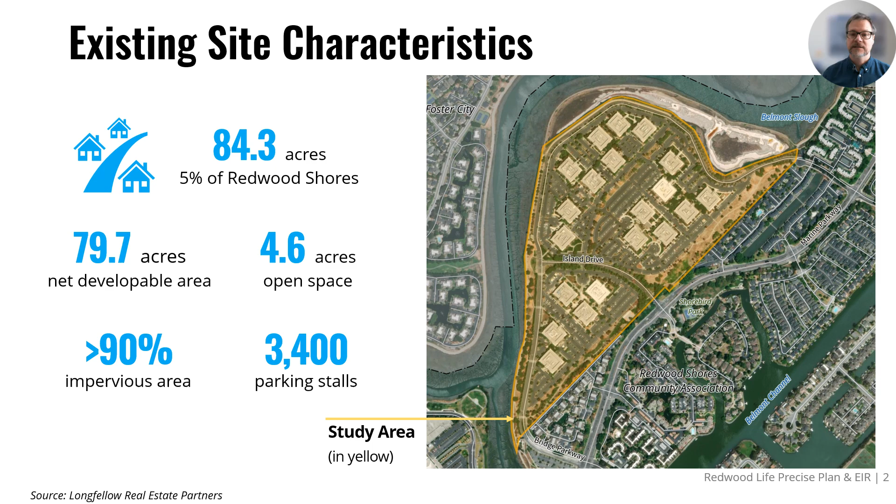The Redwood Life project site is about 84 acres in size. Approximately 80 acres represents the developed portion of the site, and about 4.6 acres are open areas. The area has a high proportion of impervious cover, meaning that most of the site is covered by paved surface, parking, or buildings. The site has around 3,400 parking stalls.

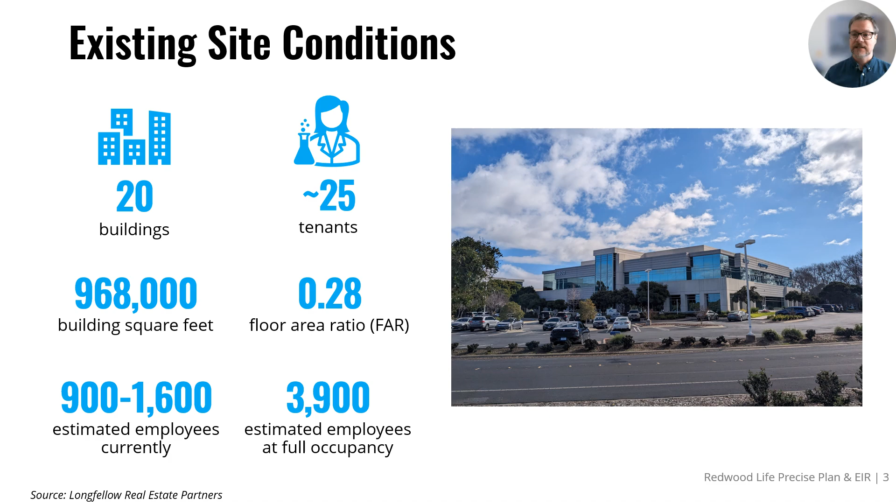The site currently hosts 20 two-story buildings that house over 25 tenants and an estimated 900 to 1,600 employees in research and development and life sciences. These buildings account for just under 1 million total square feet. At full occupancy, the existing buildings could accommodate nearly 4,000 employees.

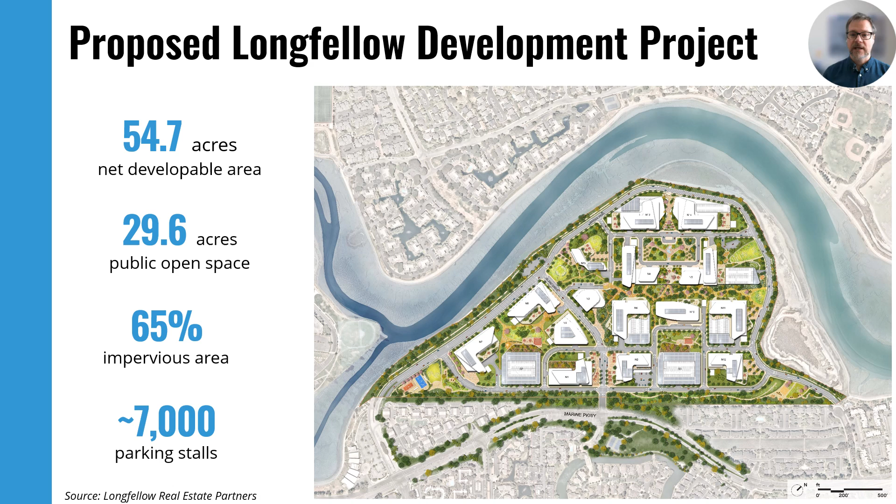Longfellow Real Estate Partners submitted a development application for the redevelopment of the site in 2022. The development project proposes to replace the existing 20 buildings with 15 new buildings. The proposal would remove nearly all of the on-site surface parking, with parking in a mix of standalone structures and podium-parked buildings. The project would increase the number of parking stalls on the site to accommodate a project build-out with up to 7,000 stalls.

This reconfiguration facilitates the development of approximately 30 acres of public open space and landscaping in the project area. This map illustrates the location of the hotel, amenity center, parking garages, and some of the parks and open spaces in the proposed Longfellow development project.

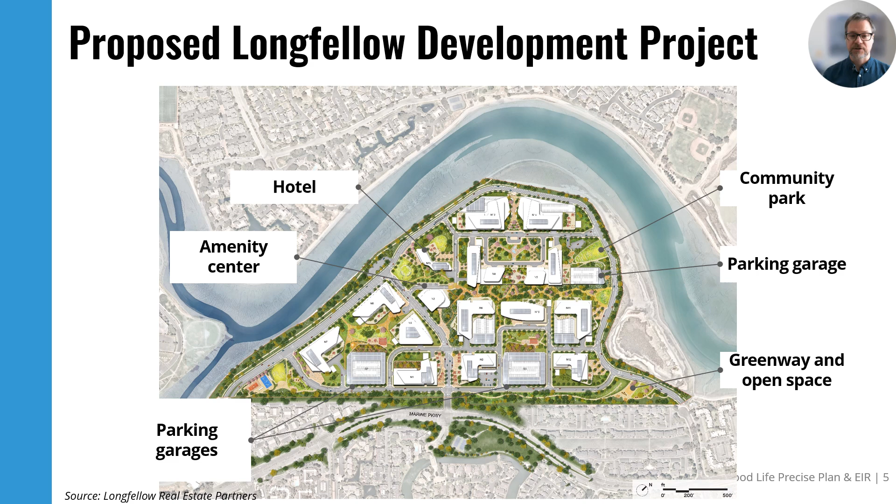The proposed development project requested an increase of 2.35 million square feet of new life sciences over the current existing 1 million square feet, to approximately 3.3 million total square feet. This includes a 104-room hotel and a publicly accessible amenity building. The floor area ratio would increase from approximately 0.3 to 0.95.

Most of the proposed buildings are between 4 and 5 stories in height, with some up to 6 stories, or 100 feet. The proposed project has an estimated phasing plan of 25 years.

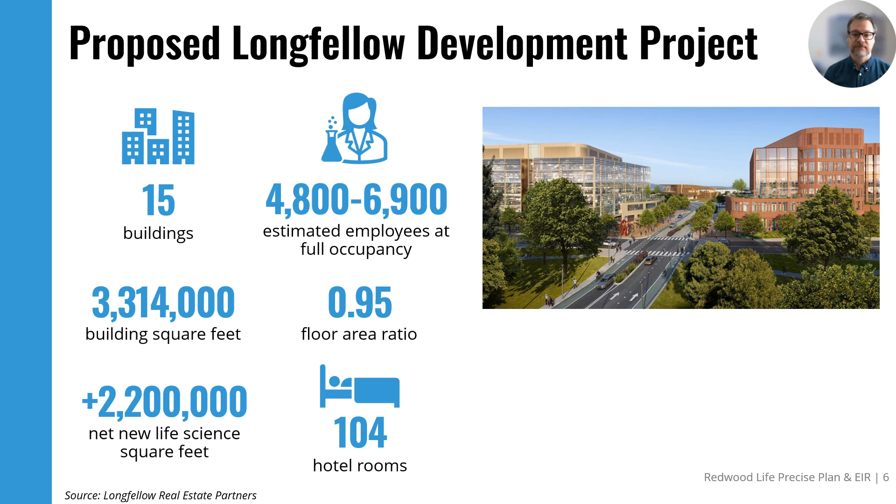As part of the proposed development project, Longfellow proposed a series of community benefits aligned with the city's strategic plan. These include contribution of $85 million for affordable housing in partnership with Eden Housing, a $2 million investment in childcare partnership with Build Up San Mateo County, an approximately 50,000 square foot amenity center with a community multipurpose room and gym.

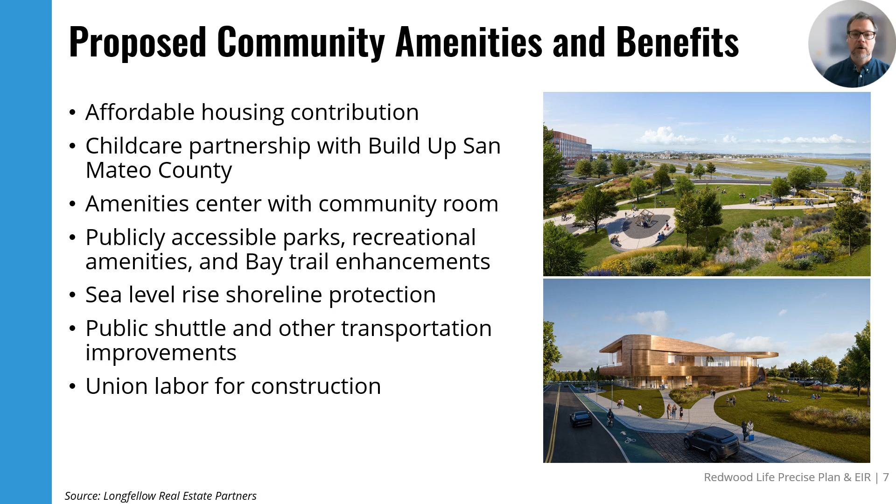Also, raising approximately 1 mile of the elevation of the levee around the site and road along the Belmont Slough for flood protection, provision of publicly accessible open space, and participation in a transportation management association to improve transit, carpool, and other active modes of travel to and from the site.

As part of this city-led precise plan and environmental impact process, City Council asked staff to prepare a project alternative to the proposed Longfellow development proposal to study through the California Environmental Quality Act environmental review process. Both the proposed Longfellow development project and the project alternative will be studied in full technical detail.

Once confirmed, the project team will initiate environmental analysis of the proposed Longfellow development project and the CEQA project alternative. This will include evaluation of potential impacts and, if needed, additional mitigation measures. It will also include detailed technical analysis of the transportation and wet utilities systems.

This included increased traffic, construction impacts including noise, truck traffic, deliveries, and the handling of materials on site, as well as the length of the development process.

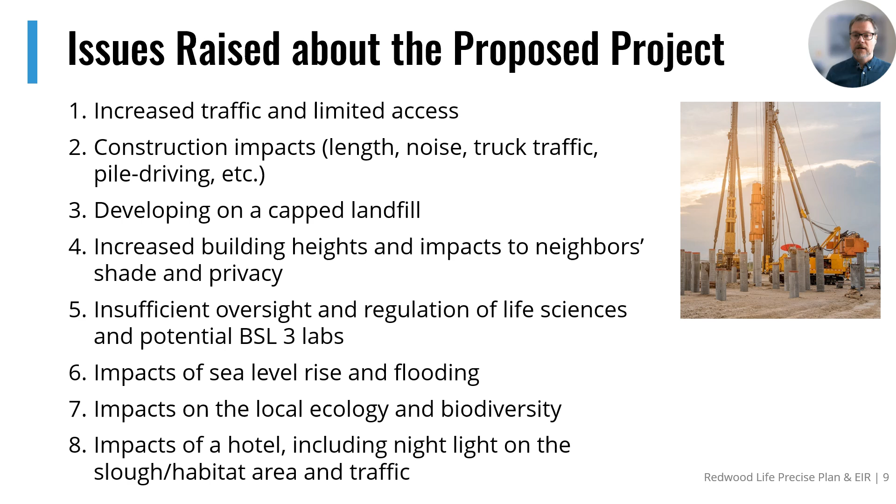Potential impacts associated with developing on a former landfill, including emissions or leaks, insufficient oversight and regulations of life sciences, and concerns about biosafety levels; impacts on local ecosystems and biodiversity from impacts of the project; and then impacts of the hotel, including night light on the Slough, as well as traffic overall.

We considered those comments combined with other community feedback we received on specific urban design strategies and site plan analysis, along with the development principles crafted earlier in the project, to shape the preliminary project alternatives. The development principles are intended to provide general guidance for the project at a high level, akin to guiding principles—statements of intent about the broad outcomes we hope to achieve, meant to guide the precise plan and its implementation.

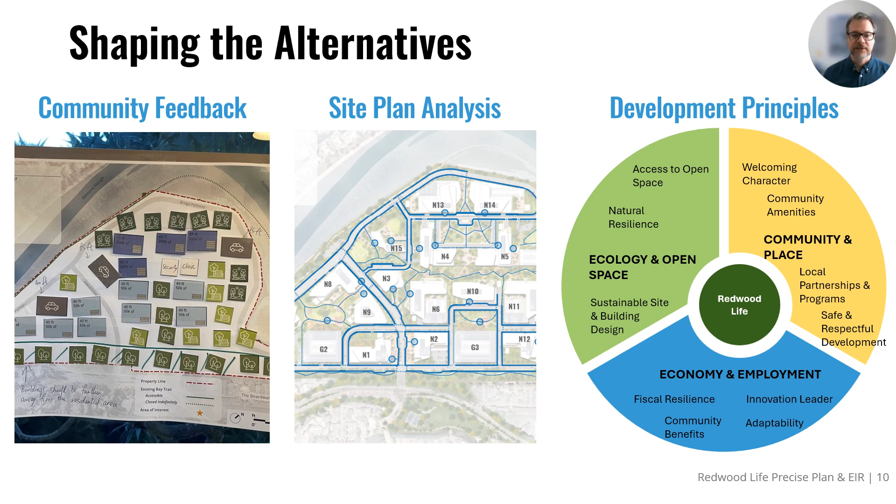From the community feedback and analysis, as well as those development principles, several key urban design themes emerged about the proposed Longfellow development project. These themes related to the total project size or scale, the location and height of the buildings, how far those buildings are set back from the property line along Marine Parkway and adjacent to existing homes, setbacks from the Belmont Slough, street location and parking garage access near existing homes, and the amount and location of the greenways and community amenities building.

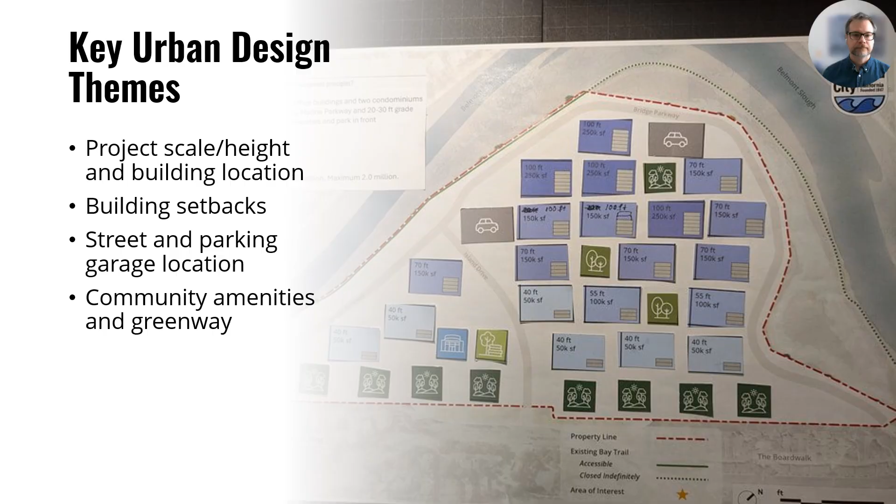Based on those themes, two alternatives were developed. The proposed Longfellow development project is on the top of the screen, and the two alternatives are below. These alternatives begin to test different urban design strategies to address concerns raised in the process. Rather than describe each alternative separately, we have broken them into a series of simpler graphics intended to illustrate how the alternatives address those urban design strategies.

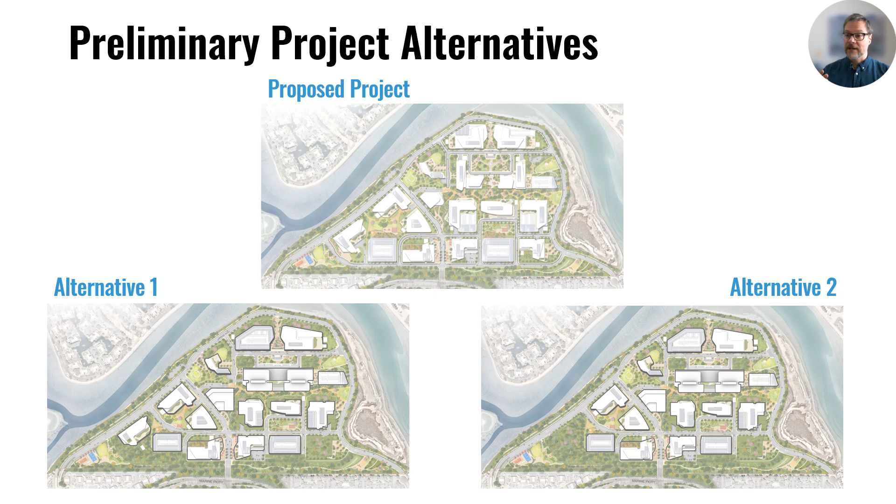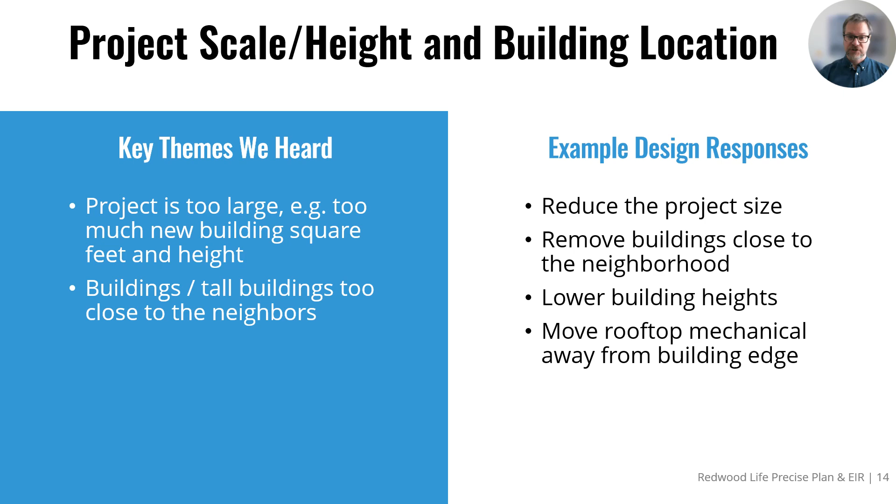Likewise, with fewer square feet, the project alternatives increase the amount of on-site open space. Through our listening sessions, we heard the proposed Longfellow development project was too many square feet and too tall, and that those taller buildings were too close to the neighbors. Several of the example design responses we tested in the alternatives included reducing the number of buildings, especially close to the neighbors, then lowering building heights in specific locations, as well as reducing the overall project size.

This map illustrates the proposed building heights and locations for the proposed Longfellow development project. The darker blue colors represent the tallest buildings, proposed at approximately 90 to 100 feet in height, or about 6 stories. Medium blue buildings are approximately 75 to 90 feet, or about 5 stories. The lightest blues are under 60 feet—these are the parking structures and the community amenity building. The proposed Longfellow development project adds 2.35 million net new square feet to the site, totaling 3.3 million square feet, and includes a 104-room hotel.

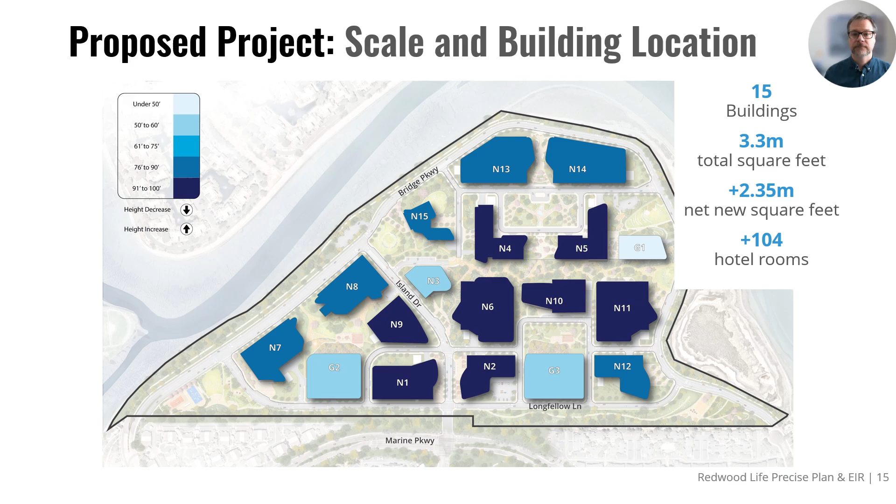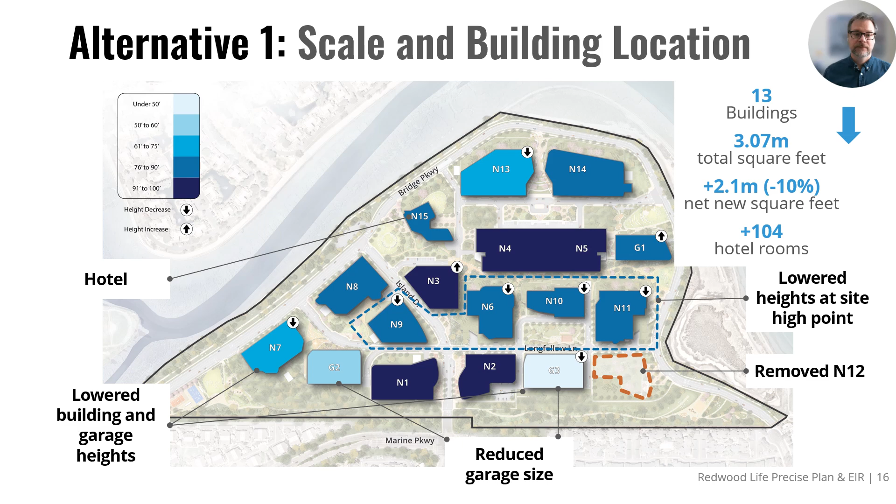This map illustrates the proposed building heights and locations for Alternative 1. The alternative removes building N12 on the northeast property line and lowers the building and garage heights closest to existing homes. It also lowers building heights at the high point of the site to reduce overall visual impact. Alternative 1 adds 2.1 million net new square feet to the site, including a 104-room hotel, totaling 3 million square feet. This is a reduction of 244,000 square feet, or 10%.

This map shows the proposed building heights and locations for alternative 2. Building on alternative 1, this option removes buildings N12 and N7 along the property lines. It lowers the building heights, reduces the size, and sets back the parking garages along the property line. It also lowers building heights at the high point of the site to reduce visual impact.

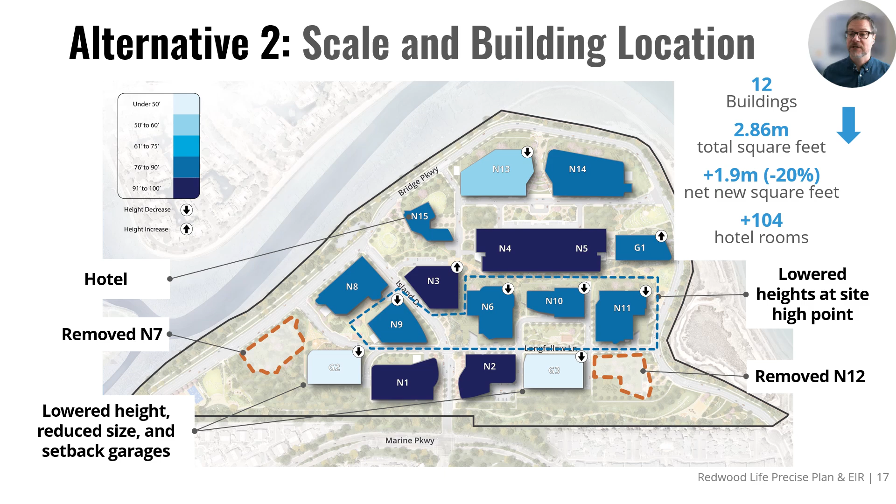Alternative 2 adds 1.9 million net new square feet, including the 104-room hotel to the site, totaling 2.86 million square feet. This is a reduction of 459,000 square feet, or 20%, from the proposed Longfellow development project.

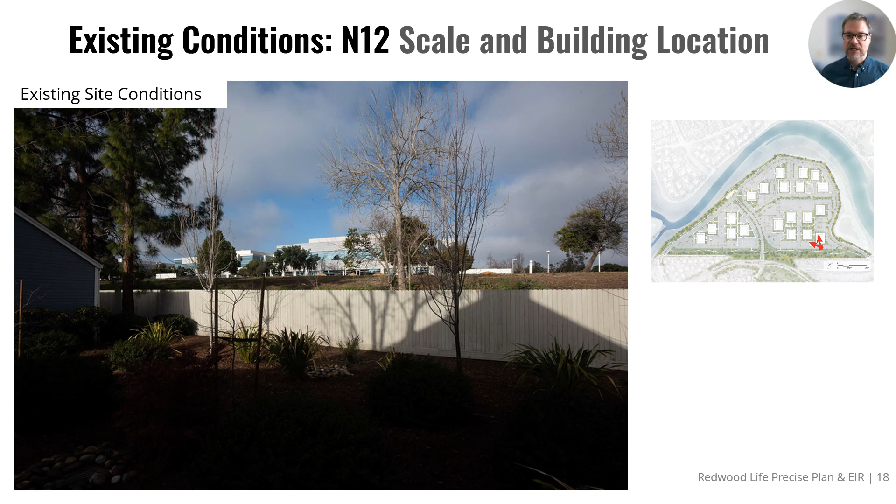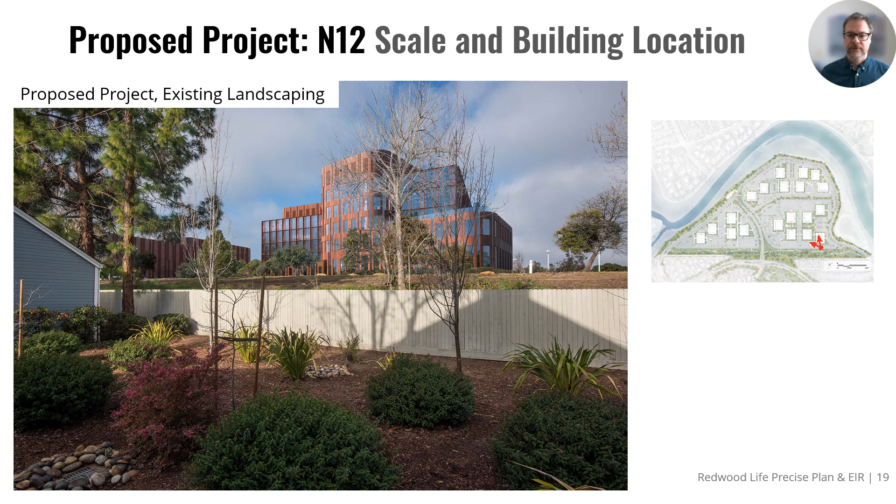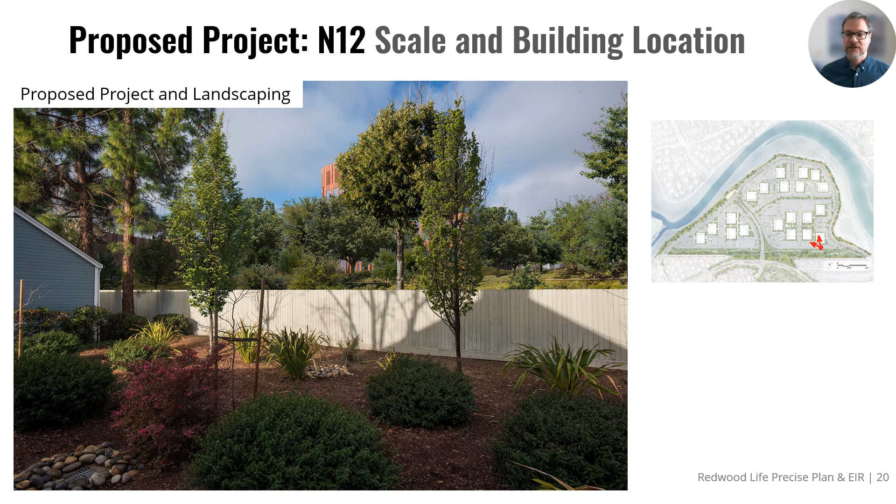This illustration shows the proposed Longfellow development project with the existing landscaping. It does not show any new landscaping along the property line. This illustration shows the proposed Longfellow development project with additional new landscaping along the property line. While it masks the building somewhat, you're still able to see it peeking through the vegetation.

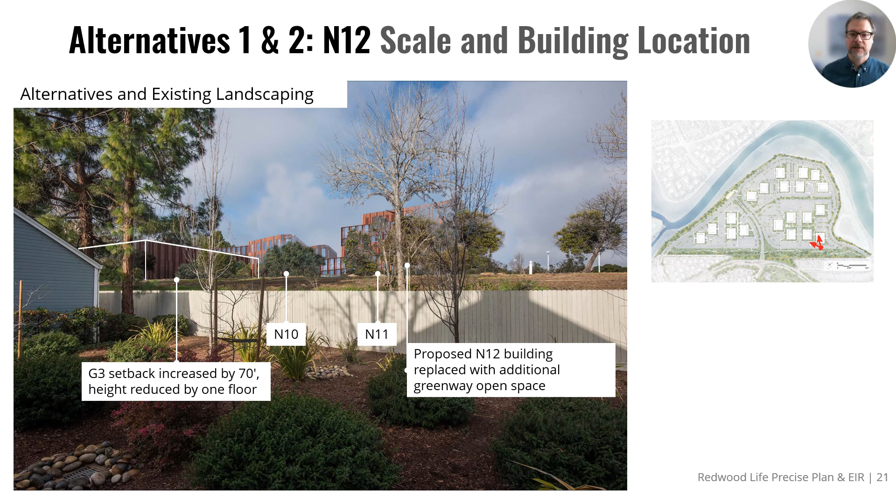This illustration shows the preliminary draft alternatives for the same location with the existing landscaping in place. Garage 3 is set back further from the property line, and building N12 is replaced with landscaping. Here's the same illustration of alternatives 1 and 2 with the proposed landscaping and open space along the property line.

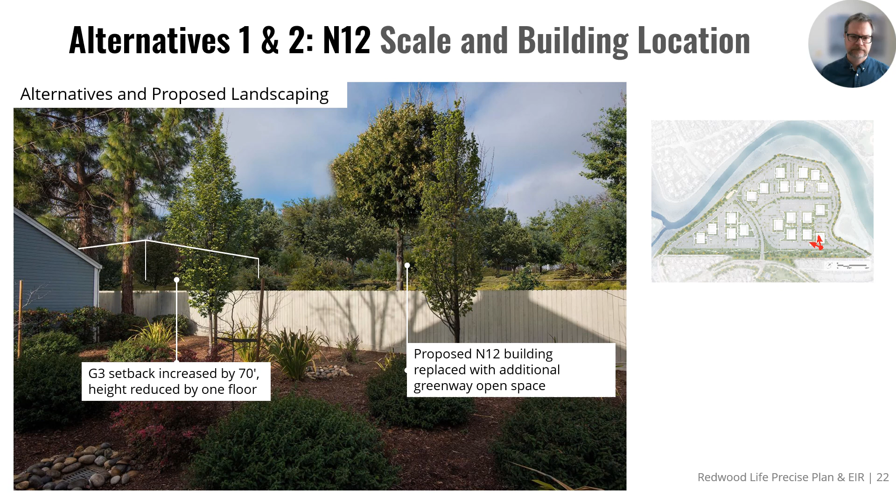Through our listening sessions, we also heard the proposed Longfellow development project buildings were too close to the neighbors and too close to the Belmont Slough. Several of the example design responses that we tested in the alternatives included setting the buildings further back from the property line and the slough and lowering building heights near the neighborhoods, as you saw in the last slide. The following slides walk through those setbacks.

This map illustrates the building setbacks for the proposed Longfellow development project from the southeast property line along Marine Parkway. The map includes black lines that show the setback from the property line and the blue lines that show the distance to the closest neighbor north and south of Island Drive.

We measure the setback distance from the property line. However, there's additional distance between the property line and homes on either side of the property line. North of the central site location on Marine Parkway and at Island Drive, that space includes largely backyards. South of the entrance from Marine Parkway, this space includes residential unit access and parking.

On average, the buildings are approximately 135 feet from the property line. This distance is less at the site entrance along Marine Parkway, approximately 95 feet from the property line, but increases to 150 and 185 feet north and south of the entrance.

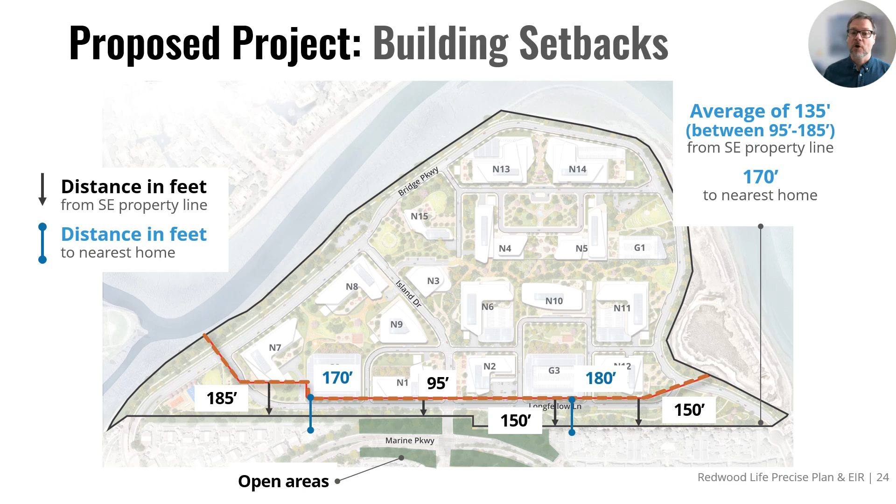This map illustrates the proposed building setbacks for alternative 2. On average, the building setbacks increase to 270 feet from the property line. Like alternative 1 and the proposed Longfellow development project, the setback distance is less at the site entrance along Marine Parkway, increasing again to 100 feet from the property line, and 450 feet and 620 feet north and south of the entrance to Marine Parkway.

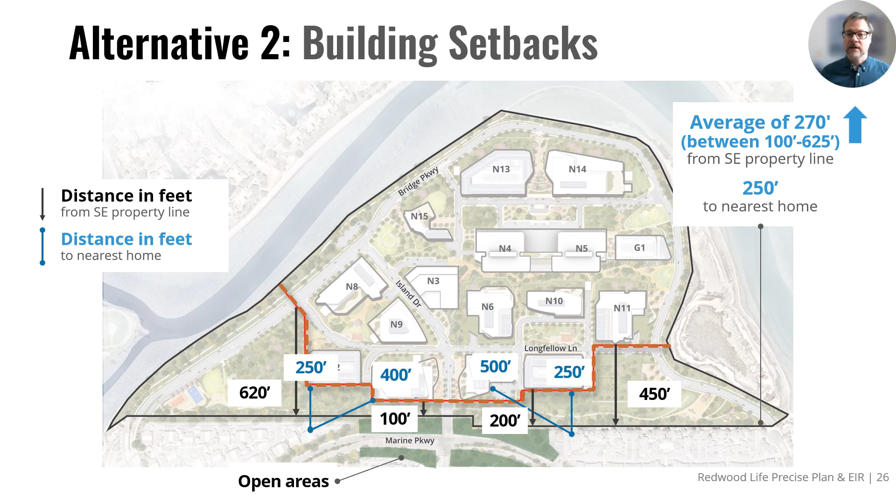The additional setback of 620 feet along the south property line relates to the removal of building N7. So now you can see the removal of these two buildings increases the setbacks near many homes. Like alternative 1, garages G2 and G3 are still the closest buildings to existing homes with a distance of 250 feet. The distance of buildings N1 and N2 at the gateway of Marine Parkway and Island Drive are 400 and 500 feet, respectively.

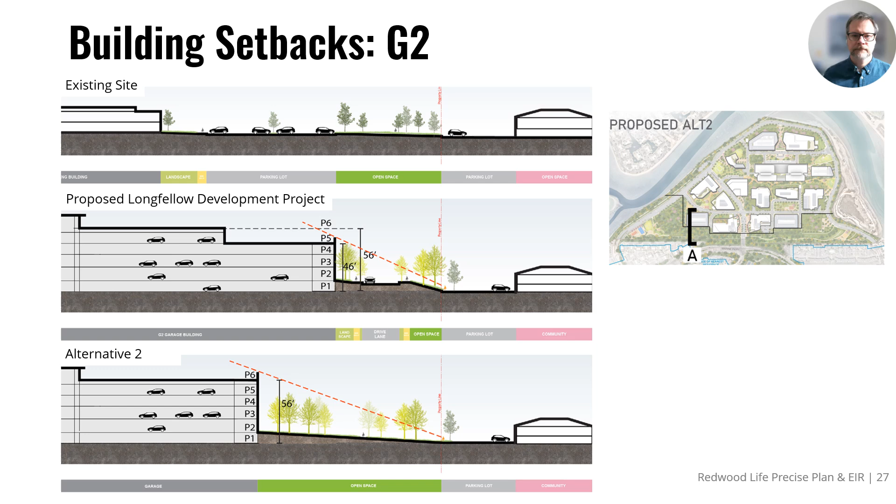Over the next few slides, I'll show illustrations of building N1 and N2. These buildings are at the entrance of Marine Parkway and Island Drive. They are two of the closest buildings to the entrance to the site and to existing homes as well. On your right, you'll see a key showing again the location of the cross sections.

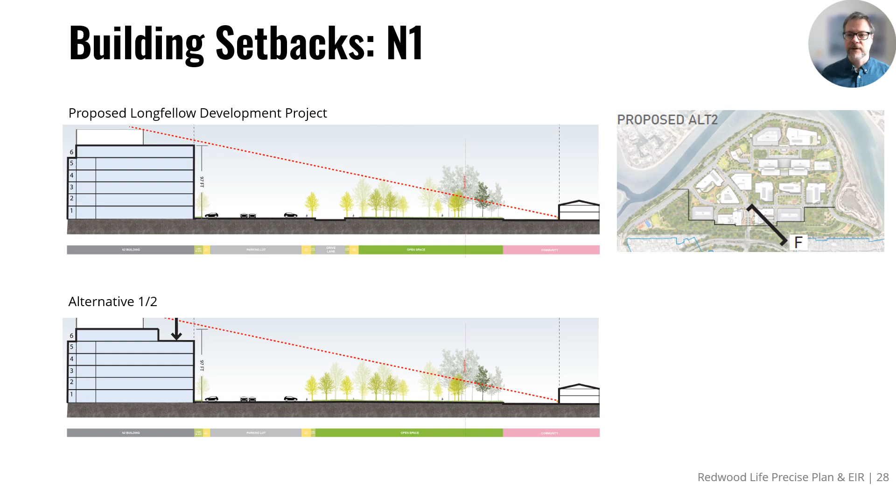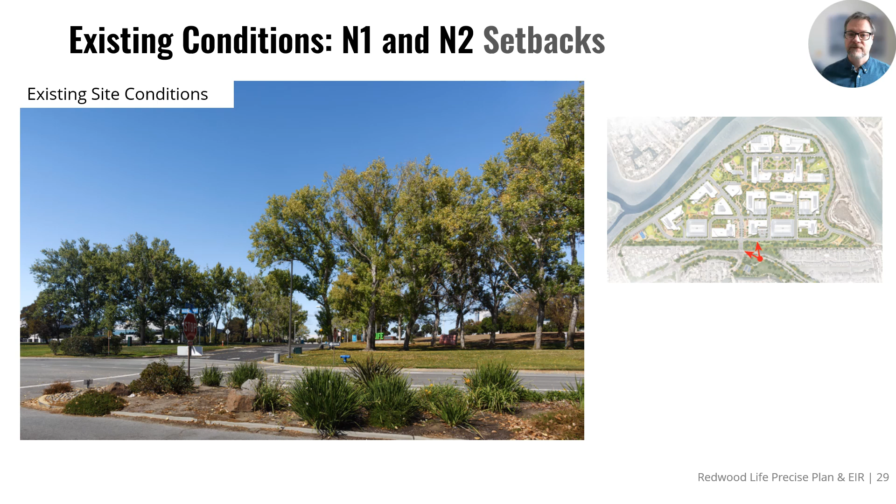The next several images show you visualizations from Marine Parkway at Island Drive. This image shows existing site conditions. The open space along Marine Parkway shown in this image is not part of the Redwood Life campus. The property line is set back approximately 100 feet from Marine Parkway.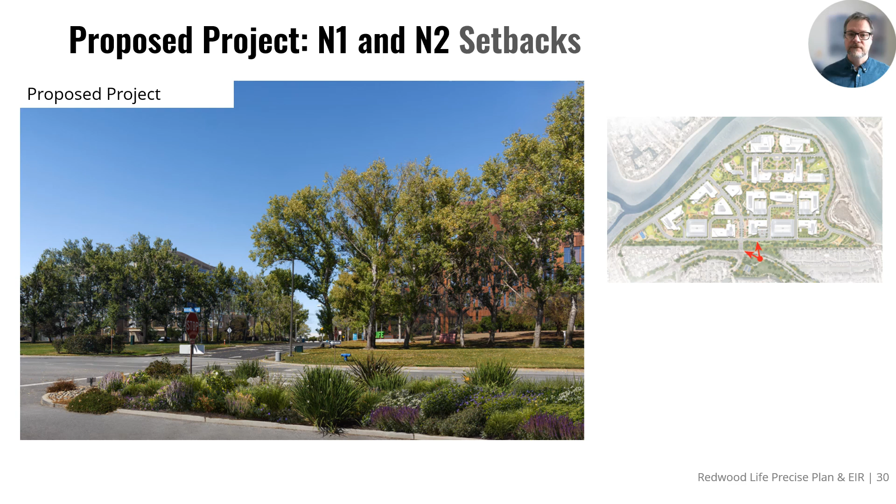This illustration shows the proposed Longfellow development project. The property line is approximately 100 feet from Marine Parkway. So while the project is set back approximately 95 feet from the property line, the buildings are approximately 200 feet or so from Marine Parkway.

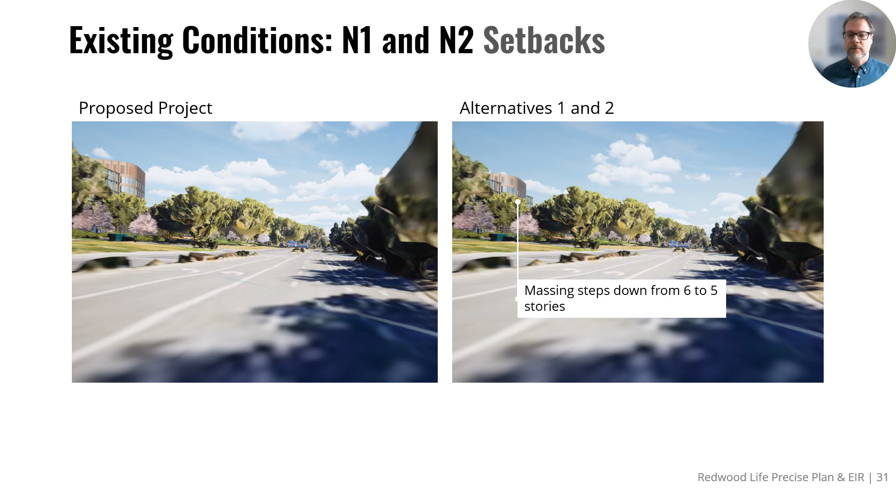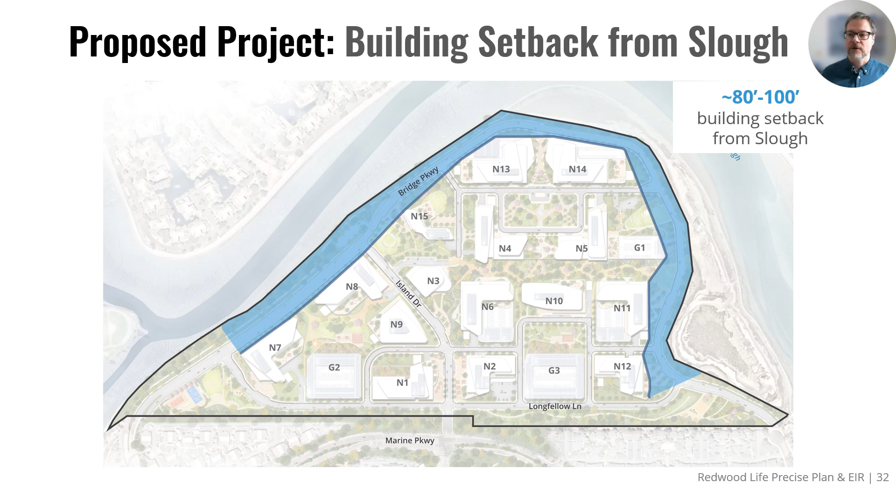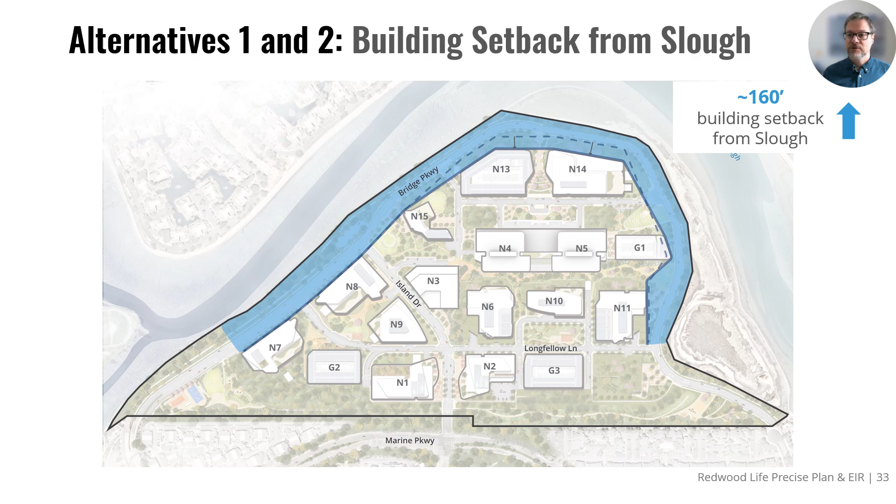This map illustrates the proposed building setbacks from alternatives 1 and 2. Buildings are set back about 160 feet from the slough edge. There are still streets and paths in this space, but it does allow for more distance between the buildings and the slough, more opportunities for planting, and less shading of the habitat areas.

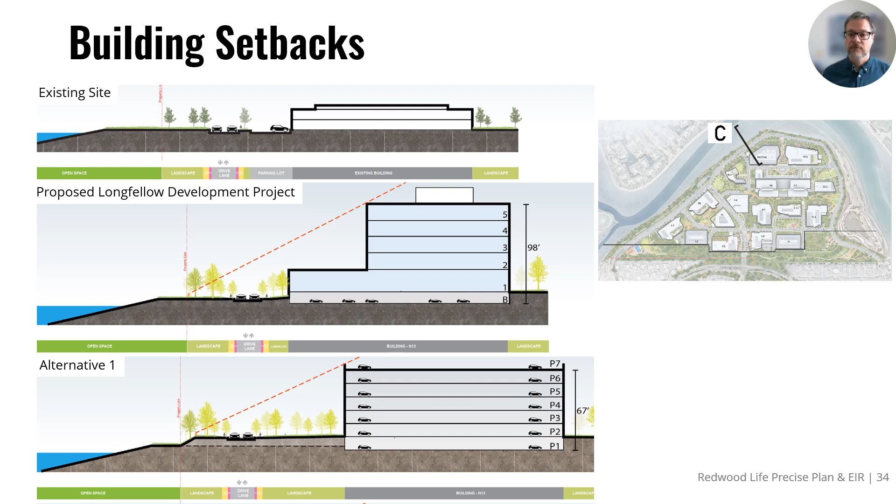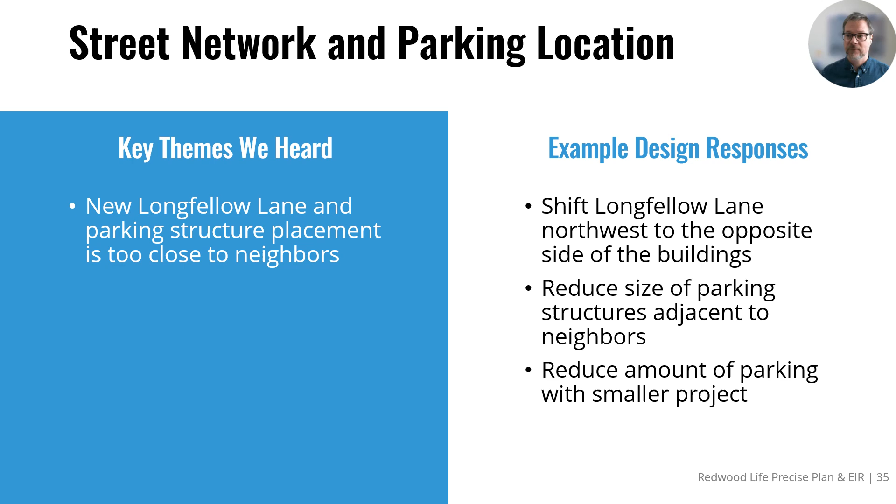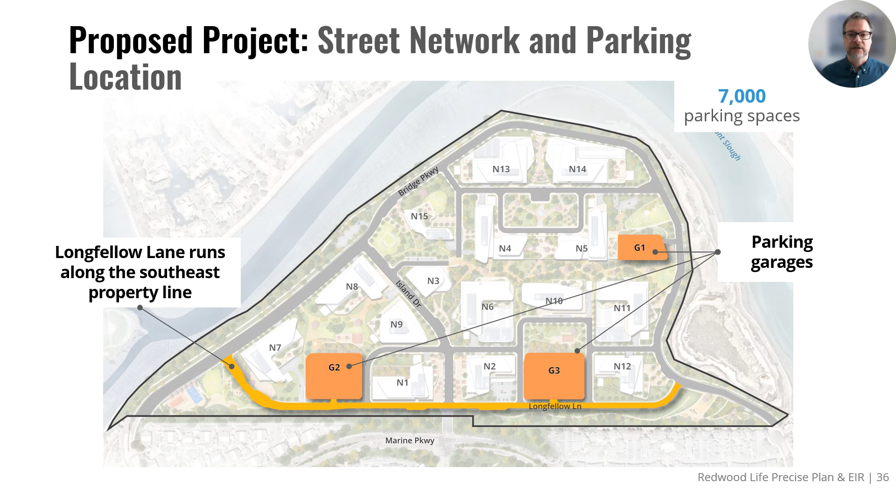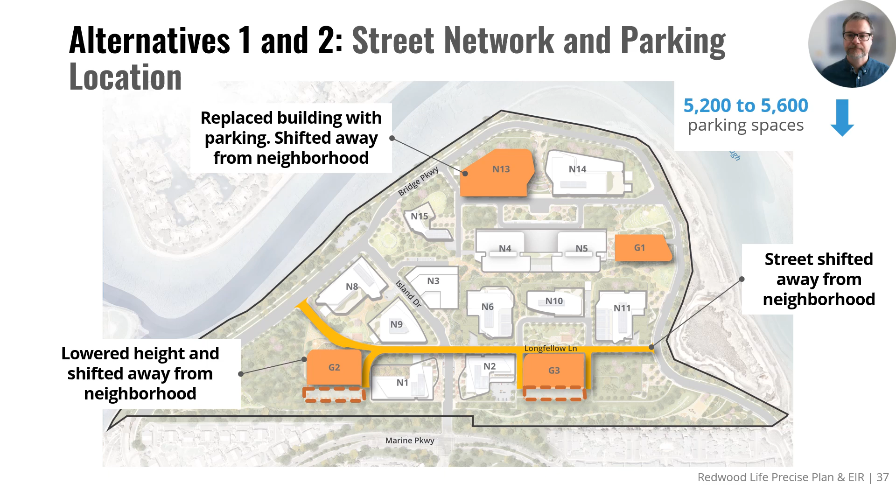Through our listening sessions, we also heard the community amenities were too far from the existing neighborhood, and there was an opportunity to create an amenity-rich space. Several of the example design responses we tested in the alternatives included moving the community amenity building closer to the site entrance from Marine Parkway and Island Drive, and expanding the greenway to create a larger buffer for the neighbors, but also to create opportunities for programming and planting.

This map illustrates the amenities center and greenway in the proposed Longfellow development project. The proposed project included nearly 30 acres of public open space and a 46,000 square foot amenity space with community multi-purpose room and gym.

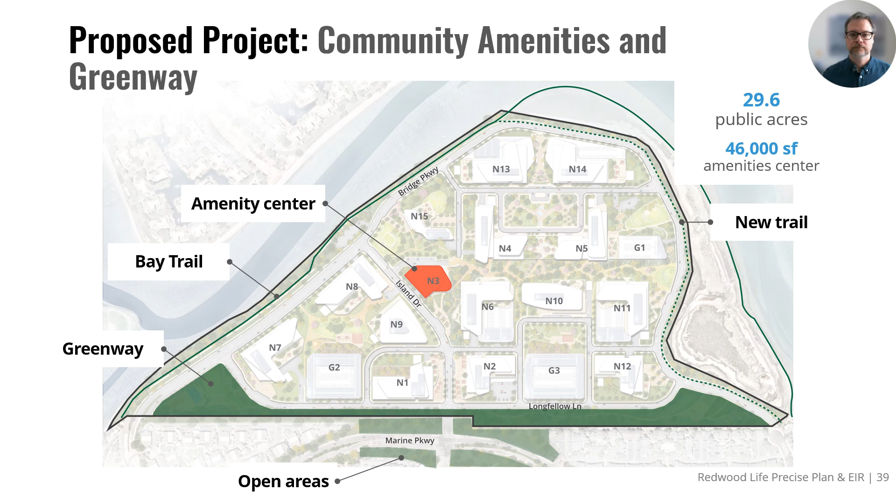Alternative 1 shifts the community amenity space closer to the neighborhood, incorporating the amenity space into a mixed-use building. The alternative includes 33 acres of public open space with an increased greenway width.

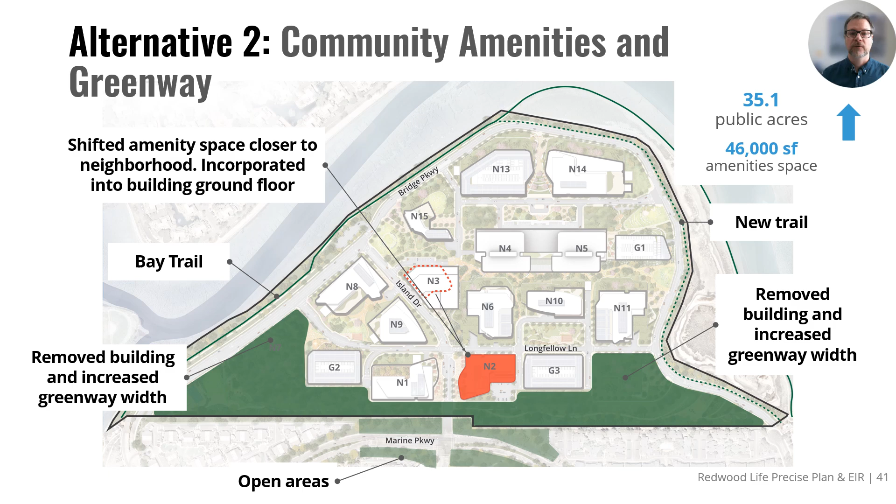Like Alternative 1, Alternative 2 shifts the community amenity space closer to the neighborhood, incorporating the amenity space into a mixed-use building. The alternative includes 35 acres of public open space with an increased greenway width associated with the removal of buildings N7 and N12.

This slide provides a summary of the urban design strategies and their implications for the alternatives as compared to the proposed Longfellow development project. Alternative 1 removes 2 buildings, including N12 near the neighborhood. It lowers the height of buildings at the high point of the site, reducing the overall project size by 244,000 square feet, or 10%. Alternative 2 removes an additional building, N7 near the neighborhood, reducing the project size by 459,000 square feet, or a 20% reduction from the proposed Longfellow development project.

Alternative 1 increases building setbacks from the property line from 135 feet on average to 225 feet on average, while Alternative 2 increases the setbacks to 270 feet on average from the property line. Buildings are set back 160 feet from the slough in both alternatives.

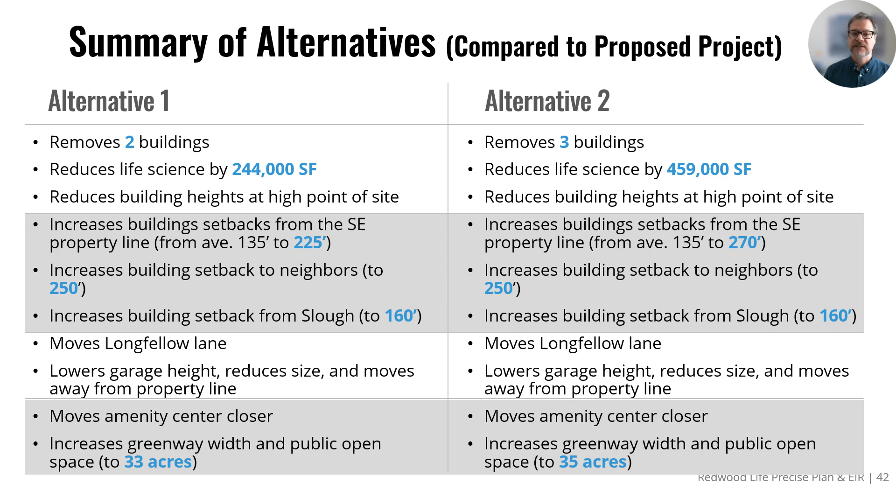Both alternatives shift Longfellow Lane internally to the site, lower garage heights and widths, and move them further from the property line. Finally, both alternatives move the community amenity space closer to the neighborhood into a mixed-use building. Both alternatives increase greenway width with deeper building setbacks and the removal of buildings.